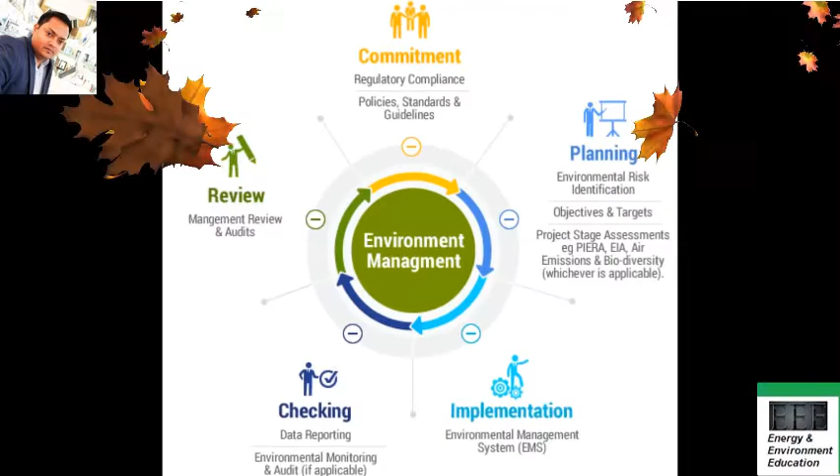So as far as the content is concerned, friends, basically I'm going to deal with two important points. First point is boiler blowdown, and also I'm going to discuss improving the boiler availability, friends. These are two important aspects that I'm going to discuss in this particular video. So if you have missed the other parts that I've discussed in different videos, please go through them. And this part is also equally important from the examination point of view. So this video will contain the boiler blowdown part and the improving the boiler availability part.

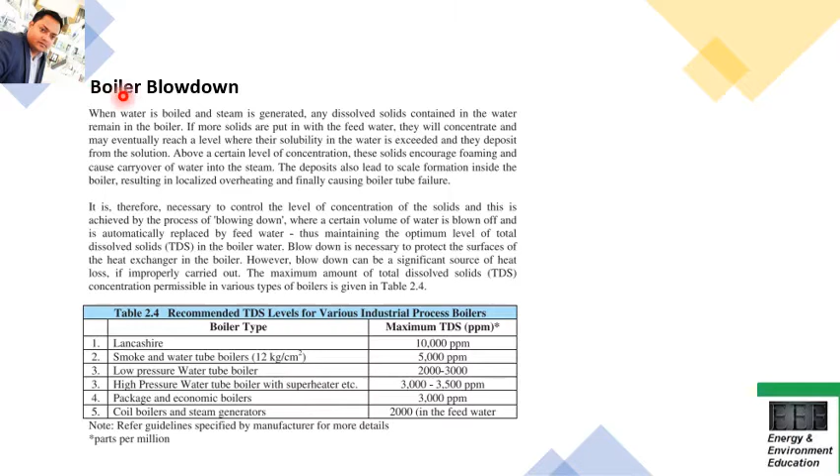Now first of all, you need to understand, friends, what is boiler blowdown. What is boiler blowdown all about, why blowdown is important, and how frequently you should go for the blowdown. These are the things that you should understand. What are the benefits of the blowdown also need to be understood from the exam point of view. A lot of questions you may expect in the exam.

First of all, they may ask you to briefly explain what is boiler blowdown. This is the first thing. Second, they may also ask you to cite some of the benefits of boiler blowdown, and also how frequently you should go for the blowdown. This type of question can be asked in the exam, friends.

So understanding the boiler blowdown part, when water is boiled and steam is generated, any dissolved solids contained in the water remain in the boiler. It's a very common phenomenon, or you can say an easy concept to understand. When the water boils, all the other particles or dissolved solids remain in the container itself. You must have observed this at home also, when you boil water in your container. You can see the dissolved solids left behind after the water evaporates. So the same phenomenon is happening here. The same concept applies here also.

So when water is boiled and steam is generated, any dissolved solids contained in the water remain in the boiler itself. Now, if more solids are put in with the feed water, they'll concentrate and may eventually reach a level where their solubility in the water is exceeded and they deposit from the solution. So if more solids are dissolved in the water that you are feeding, you'll have more content.

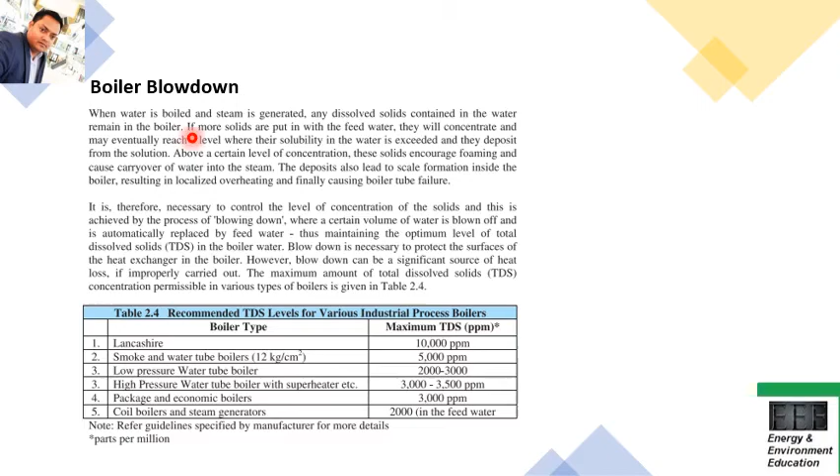So coming to the third part, how often you should go for the blowdown. There are two types of blowdown: the intermittent blowdown and the continuous blowdown. The intermittent blowdown is given by manually operating a valve. So first, it is done manually, and second, suppose you're operating a boiler for a shift, once a shift you go for 2 minutes of blowdown.

It's not continuous. Once in a shift you go for this type of blowdown, where you are extracting all the deposits inside the boiler chamber, friends. It's an intermittent process, where from time to time you do the blowdown manually. As a thumb rule, 2 minutes for one shift of boiler operation, friends. Intermittent blowdown requires large short-term increases in the amount of feed water put into the boiler, and hence may necessitate larger feed water pumps than if continuous blowdown is used.

So with continuous blowdown, compared to intermittent blowdown, you can have smaller pumps. In the intermittent case, a high amount of deposits is concentrated, because you are doing it only for 2 minutes, from time to time, not continuously. So you need a larger size pump to extract all the deposits from the boiler, friends. So intermittent blowdown uses larger feed water pumps, and for continuous blowdown, smaller size pumps can be used, friends.

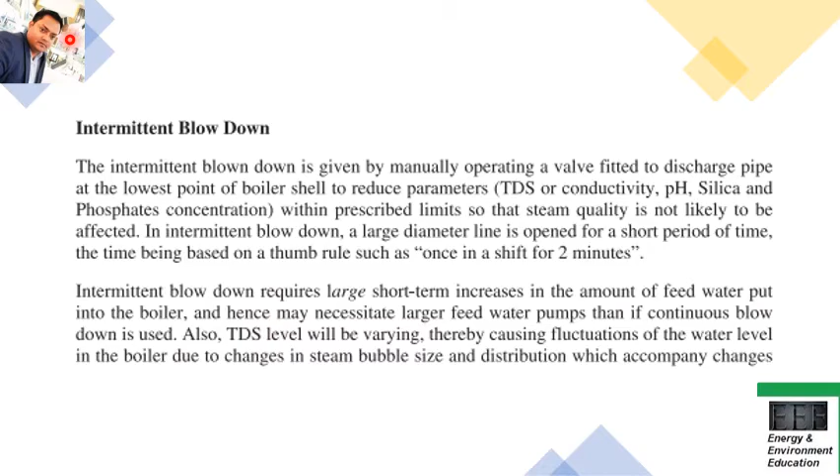So unlike the intermittent blowdown, in this case you are not using the manual blowdown. It's continuous and it is done automatically. So there is a steady and constant dispatch of a small stream of concentrated boiler water and replacement by a steady and constant inflow of feed water. So this is a continuous process. It's not an intermittent process. That's what I explained in the last slide.

And it's not done manually. It is happening automatically, friends. So there is no need for regular operator intervention. So nothing is done manually here. Automatically it is carried out, and it is not from time to time or once in a shift. It is on a continuous basis, friends.

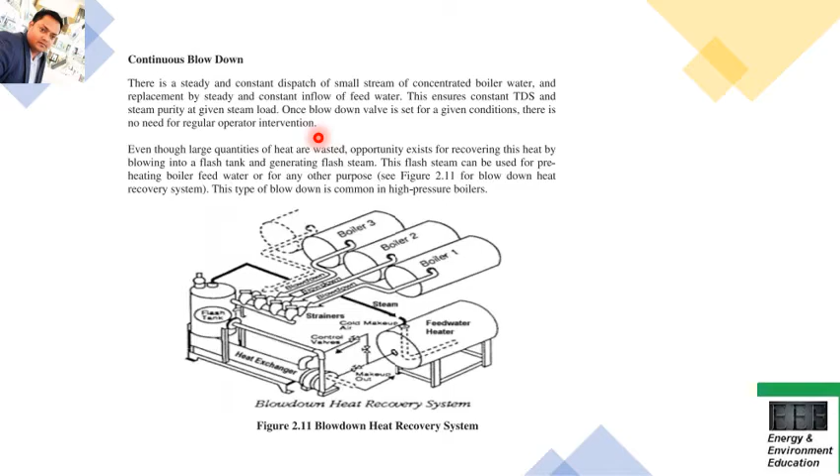Now this particular formula is also important, friends, for the calculation of blowdown percentage. You should remember this formula. A number of times questions have come in the examination where they have asked you to calculate the blowdown percentage using this formula, friends. Now in this, you can see here, they have given one example also where the maximum permissible limit is given, that is 3000 ppm. Also percentage makeup water is given here, 10%. TDS in feed water is given here, 300 ppm, and then they are asking you to calculate the blowdown percentage. So using the above formula, just putting in all the parameters given here, you're calculating the blowdown percentage as 1.11%.

Now sometimes in the exam they may either ask you to only calculate the blowdown percentage, or they may also ask you to calculate the blowdown rate. In that case, they will give you the boiler evaporation rate, like in this example, they have given the boiler evaporation rate as 3000 kg per hour, and then they are asking you to calculate the blowdown rate, friends. So the formula will be, you have to multiply the boiler evaporation rate with the blowdown percentage, and then you can calculate the blowdown rate, friends. So this is also an important formula. Both the formulas can come as a whole in the exam, or partly they may ask you to calculate only the blowdown percentage, friends. So it's very important as far as the exam is concerned.

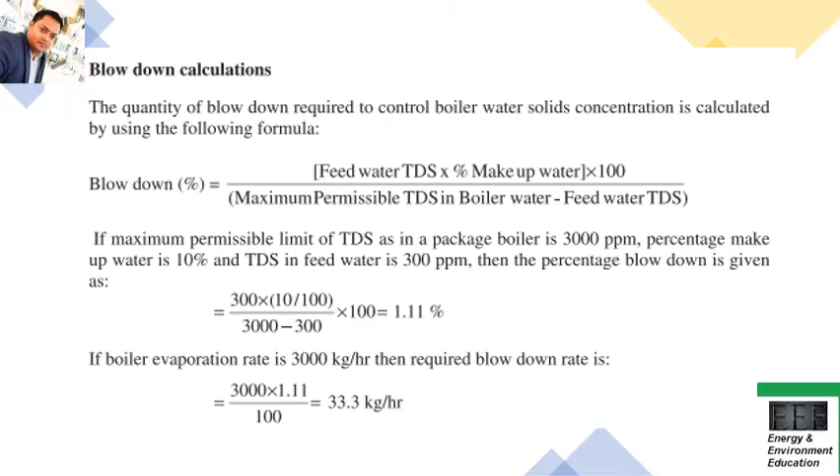They may also ask you to state some of the benefits of blowdown. So these are some of the points listed here which you must understand and also remember, as far as the benefits of blowdown are concerned, friends. So basically, with the help of blowdown, you can have lower pre-treatment cost, less makeup water consumption, reduced maintenance downtime, increased boiler life, lower consumption of treatment chemicals. So I'm not going to explain all these points in detail. They are self-explanatory and easy to understand. How the blowdown can help in better maintenance or increase in the life of the boiler, friends, those things are given here, so it's easy to understand. And please remember these points. This may be asked in the exam, to list them out, friends, as the benefits of blowdown.

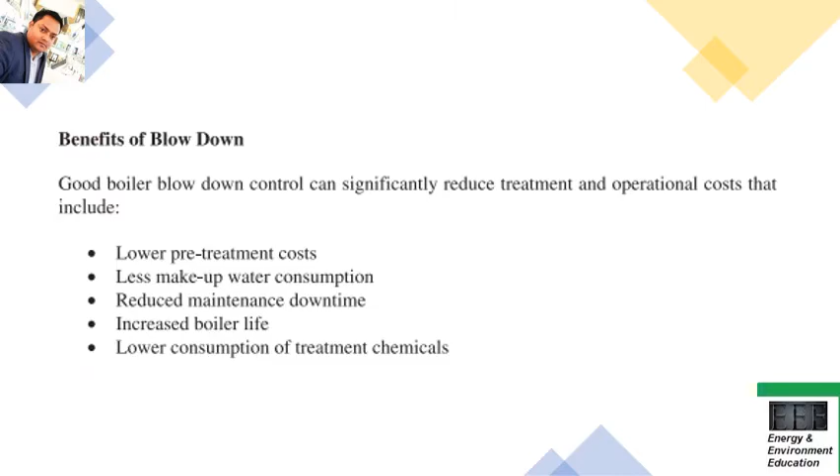Now coming to the second part, improving the boiler availability. Basically, what's happening here? You need to understand one thing, friends, that you have to maintain the boiler in such a way that there is minimum disruption in the boiler, and the boiler is operational for the maximum time. And for that you have to maintain the boiler in such a way that there are no damages in the boiler. So basically, the most important damage that takes place in the boiler is tube leakages, and you need to avoid those tube leakages. And for that, you need to take certain steps.

So basically, there are different causes for the tube leakages. Tube failures in boilers lead to reduction in the availability and call for continuous efforts to minimize the tube leakages. So basically, most of the time there are a lot of tube leakages happening in the boiler, and that has to be avoided with better maintenance, friends. Tube failures can be attributed to design, manufacturing, operational maintenance, and aging related aspects. So these are the reasons why tube failures can take place. So failure mechanisms can be classified as mechanical.

Either mechanical cause can be there, chemical cause can be there, metallurgical or any other inadequate quality compliance can be there. These are the reasons for the tube leakages, and you need to understand those causes and take certain actions to mitigate those ongoing leakages in the boiler tube, such that the boiler is properly working, efficiently working, and available the maximum time for operation, friends.

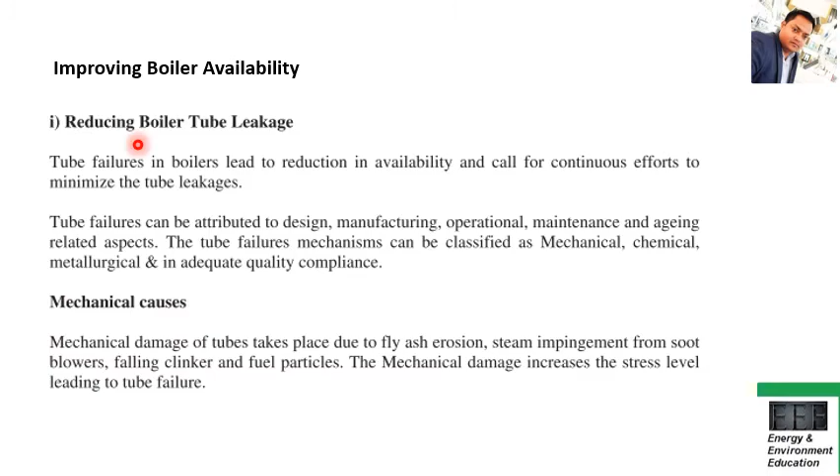Also, there are some other causes, friends, like chemical causes, metallurgical causes, and quality assurance gaps. These are some of the other causes which lead to leakages in the boiler tubes. I'm not going to explain all these causes in detail here. You can read and understand them. But all these causes have to be remembered as far as the exam is concerned, because they may ask you to explain the different causes which lead to boiler tube failures or tube leakages, friends.

So these causes have to be remembered, and point by point you can briefly explain all these causes, like the mechanical causes, the chemical causes, the metallurgical causes, and the quality assurance gaps. These are the different causes that you should understand and remember, and they may ask you to briefly explain them in the exam as a short type question, friends.

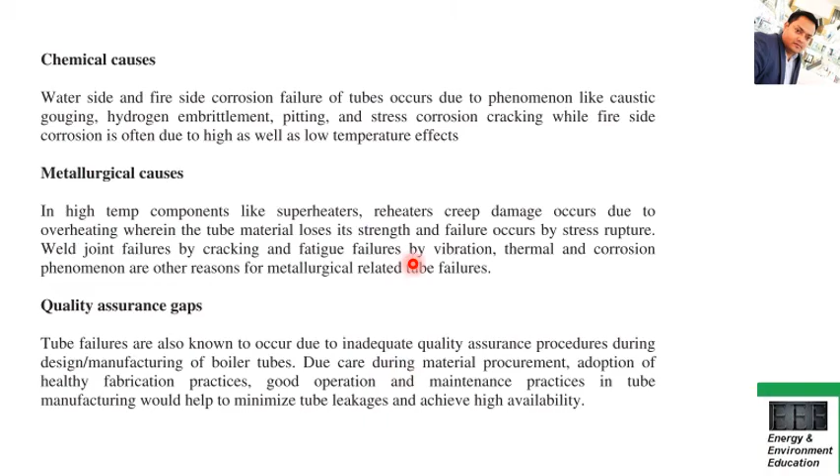So with this, I'm ending part E, friends, and hopefully this part can help you prepare for your exam in a better way. You should have got some concepts, some insights about this part of the chapter.